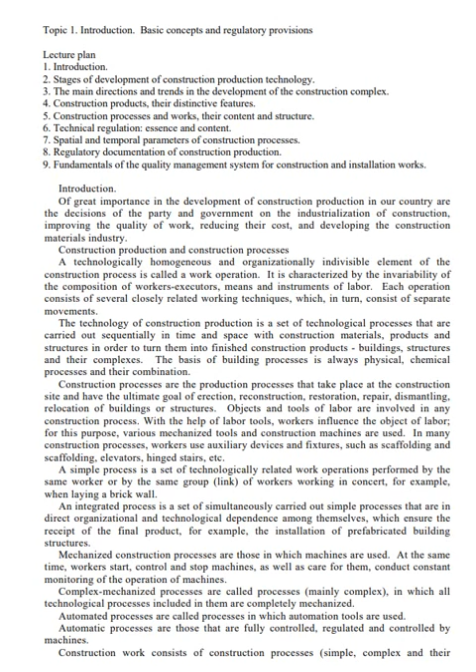Topic 1: Introduction. Basic concepts and regulatory provisions.

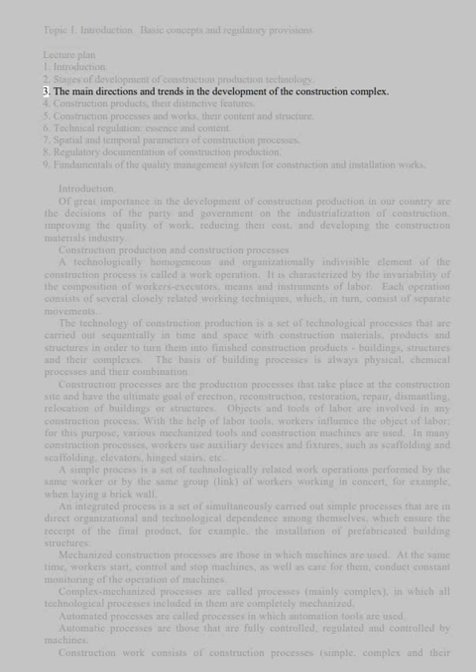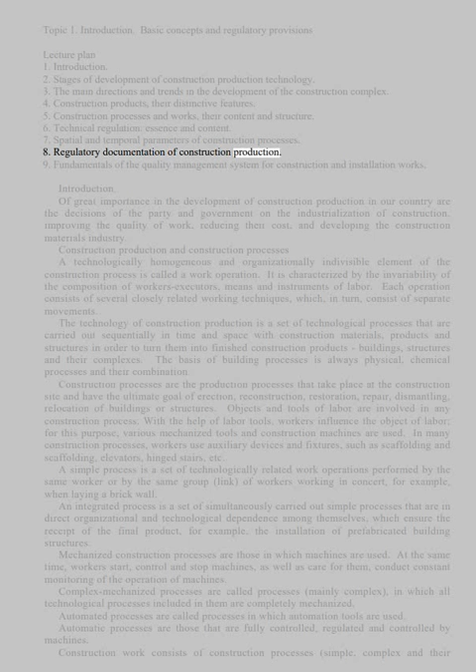Lecture plan: 1. Introduction. 2. Stages of development of construction production technology. 3. The main directions and trends in the development of the construction complex. 4. Construction products, their distinctive features. 5. Construction processes and works, their content and structure. 6. Technical regulation, essence and content. 7. Spatial and temporal parameters of construction processes. 8. Regulatory documentation of construction production. 9. Fundamentals of the quality management system for construction and installation works.

Introduction. Of great importance in the development of construction production in our country are the decisions of the party and government on the industrialization of construction, improving the quality of work, reducing their cost, and developing the construction materials industry.

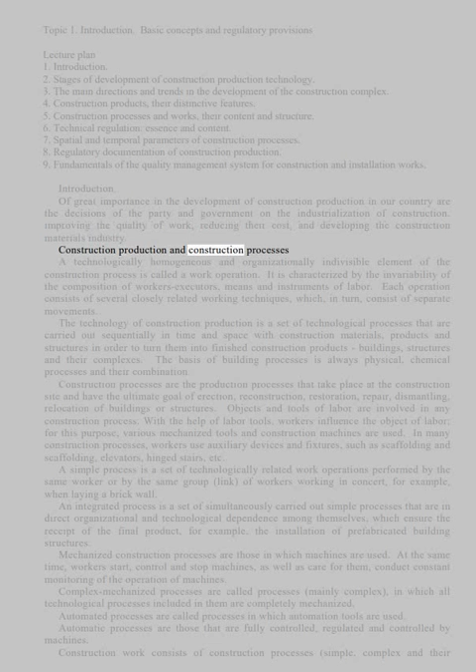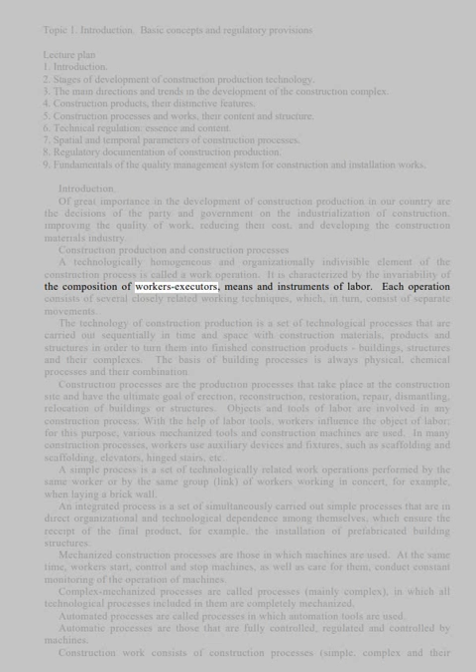In construction production, a technologically homogeneous and organizationally indivisible element of the construction process is called a work operation. It is characterized by the invariability of the composition of workers, executors, means and instruments of labor.

Each operation consists of several closely related working techniques, which, in turn, consist of separate movements.

The technology of construction production is a set of technological processes that are carried out sequentially in time and space with construction materials, products and structures in order to turn them into finished construction products, buildings, structures, and their complexes. The basis of building processes is always physical, chemical processes and their combination.

Construction processes are the production processes that take place at the construction site and have the ultimate goal of erection, reconstruction, restoration, repair, dismantling, or relocation of buildings or structures.

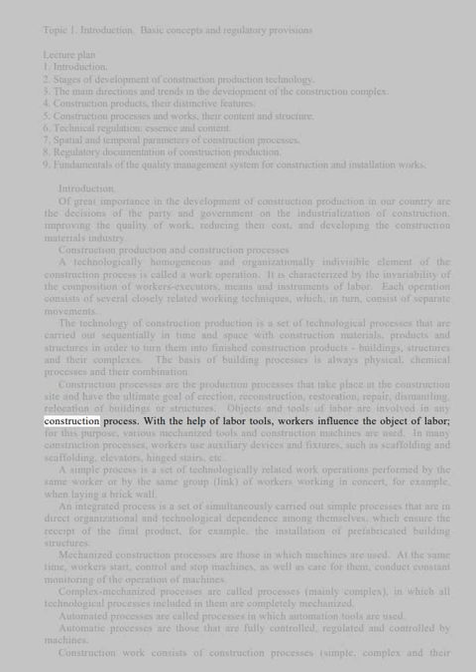Objects and tools of labor are involved in any construction process. With the help of labor tools, workers influence the object of labor. For this purpose, various mechanized tools and construction machines are used. In many construction processes, workers use auxiliary devices and fixtures, such as scaffolding, elevators, hinged stairs, etc.

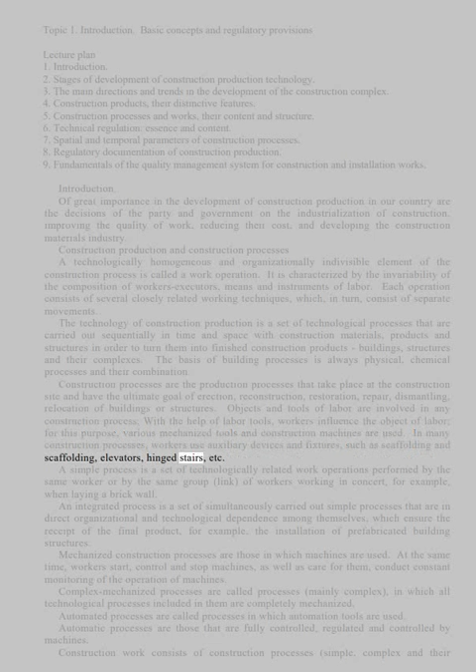A simple process is a set of technologically related work operations performed by the same worker, or by the same group or link of workers working in concert, for example, when laying a brick wall.

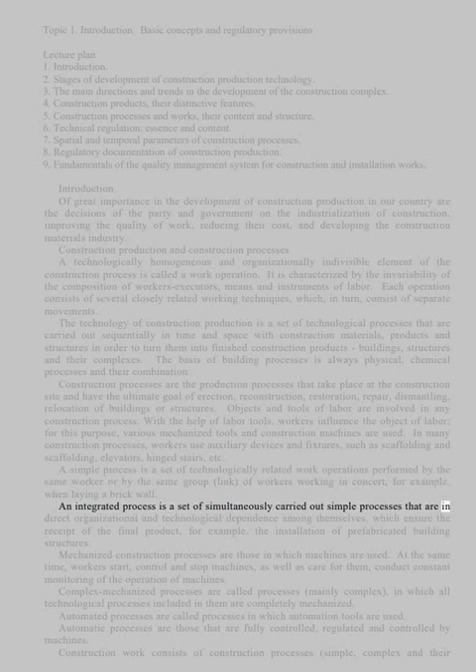An integrated process is a set of simultaneously carried out simple processes that are in direct organizational and technological dependence among themselves, which ensure the receipt of the final product, for example, the installation of prefabricated building structures.

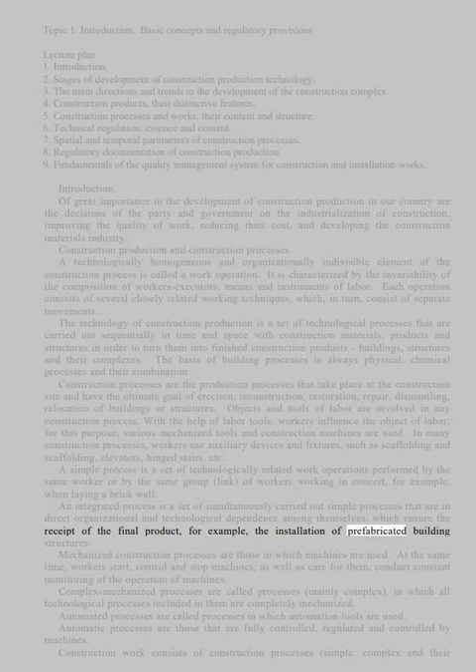Mechanized construction processes are those in which machines are used. At the same time, workers start, control and stop machines, as well as care for them, conducting constant monitoring of the operation of machines.

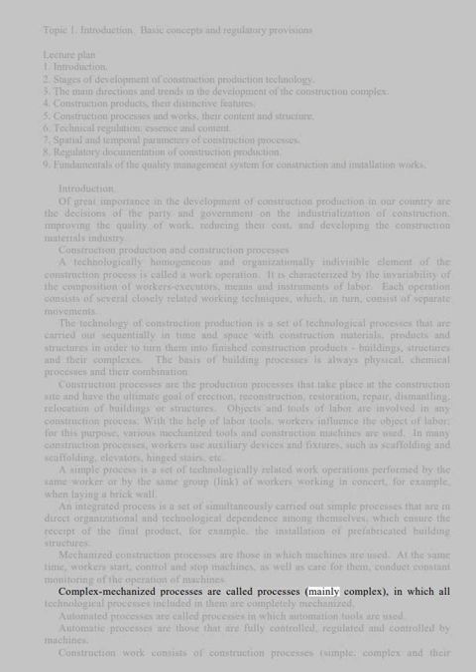Complex mechanized processes are processes, mainly complex, in which all technological processes included in them are completely mechanized. Automated processes are processes in which automation tools are used.

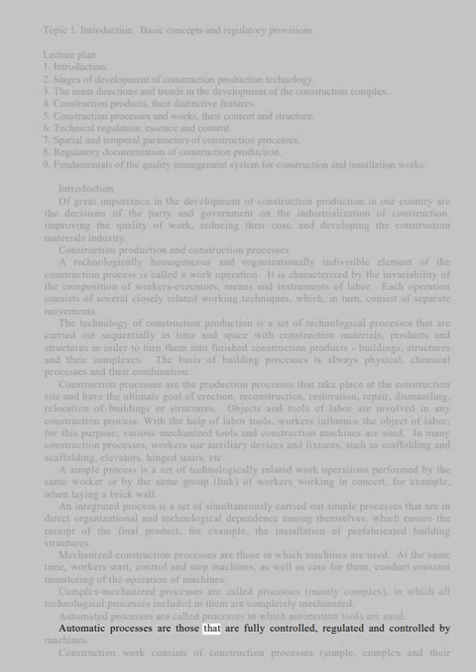Automatic processes are those that are fully controlled, regulated and controlled by machines.

Construction work consists of construction processes, simple, complex, and their combinations, the result of which is a certain construction product. It must meet the project requirements and the corresponding technical conditions in terms of size, shape, surface structure, position in space, and quality.

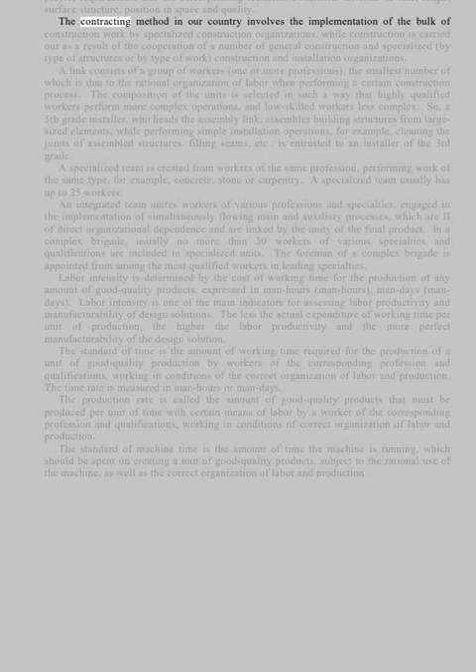The contracting method in our country involves the implementation of the bulk of construction work by specialized construction organizations, while construction is carried out as a result of the cooperation of a number of general construction and specialized organizations, by type of structures or by type of work, construction and installation organizations.

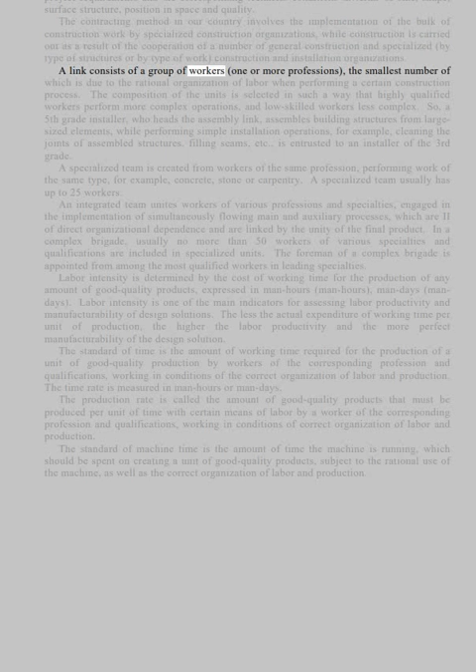A link consists of a group of workers of one or more professions, the smallest number of which is due to the rational organization of labor when performing a certain construction process.

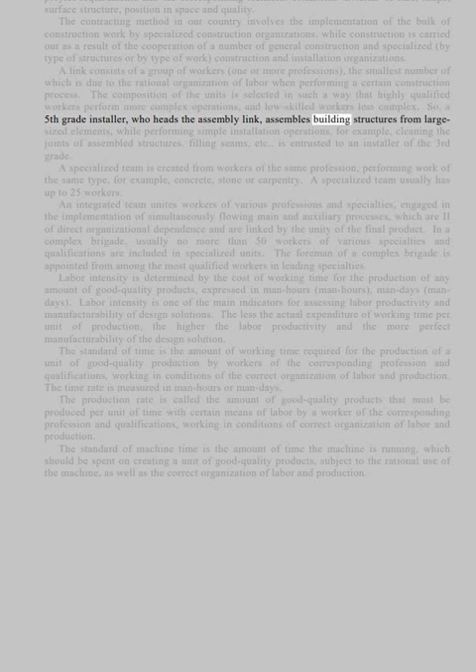The composition of the units is selected in such a way that highly qualified workers perform more complex operations, and low-skilled workers less complex ones. So, a fifth-grade installer, who heads the assembly link, assembles building structures from large-sized elements, while performing simple installation operations, for example, cleaning the joints of assembled structures or filling seams, is entrusted to an installer of the third grade.

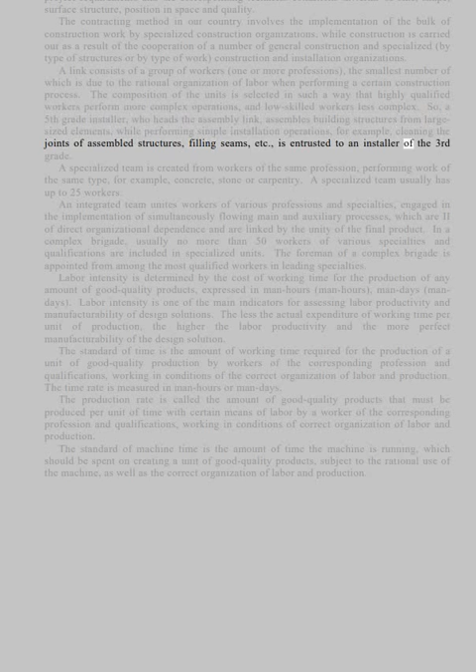A specialized team is created from workers of the same profession, performing work of the same type, for example, concrete, stone, or carpentry. A specialized team usually has up to 25 workers.

An integrated team unites workers of various professions and specialties, engaged in the implementation of simultaneously flowing main and auxiliary processes, which are in direct organizational dependence and are linked by the unity of the final product.

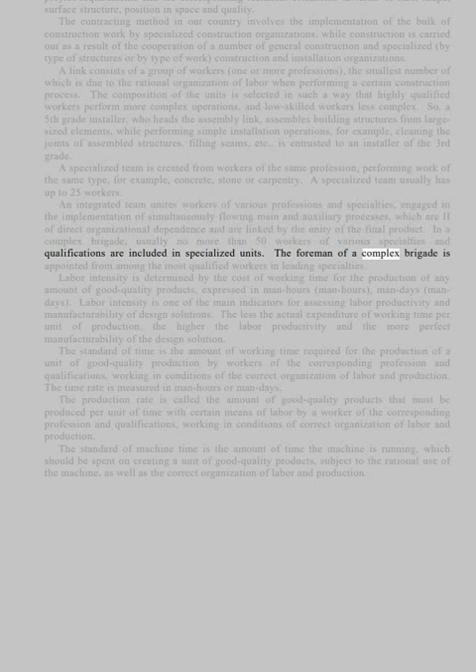In a complex brigade, usually no more than 50 workers of various specialties and qualifications are included in specialized units. The foreman of a complex brigade is appointed from among the most qualified workers in leading specialties.

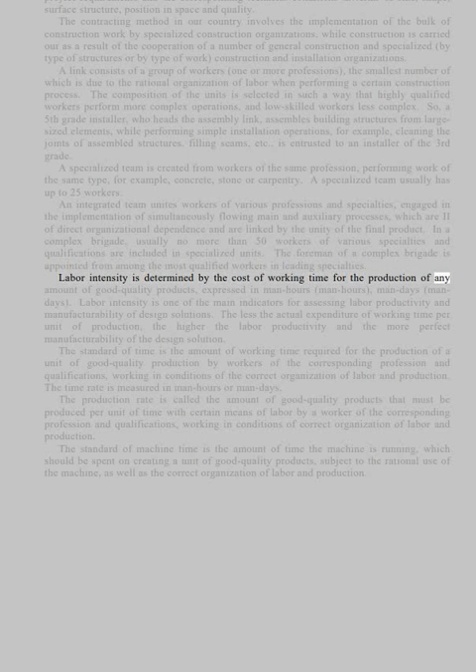Labor intensity is determined by the cost of working time for the production of any amount of good quality products, expressed in man-hours or man-days. Labor intensity is one of the main indicators for assessing labor productivity and manufacturability of design solutions.

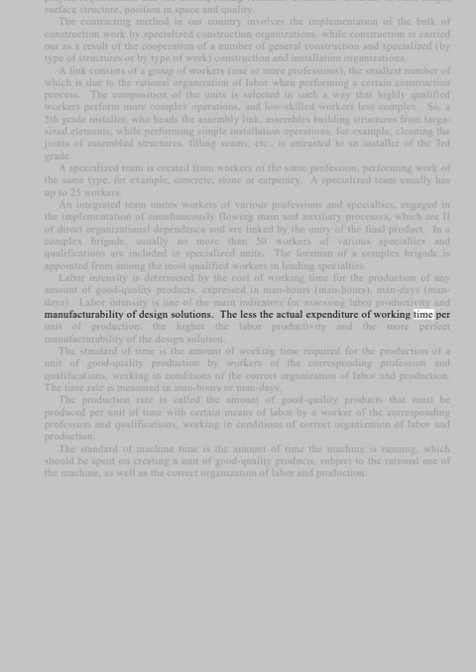The less the actual expenditure of working time per unit of production, the higher the labor productivity and the more perfect the manufacturability of the design solution.

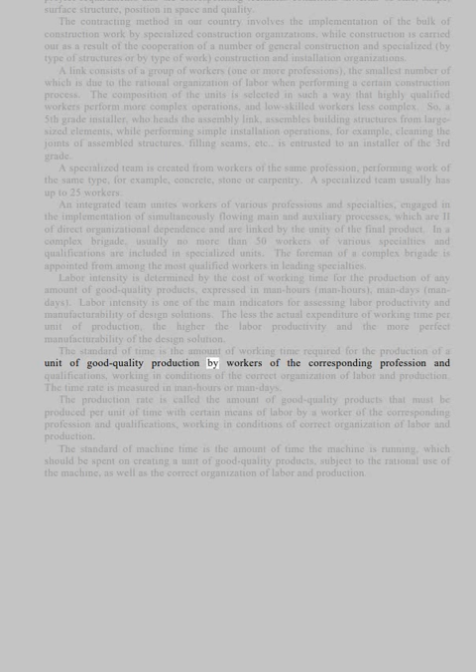The standard of time is the amount of working time required for the production of a unit of good quality production by workers of the corresponding profession and qualifications, working in conditions of the correct organization of labor and production. The time rate is measured in man-hours or man-days.

The production rate is the amount of good quality products that must be produced per unit of time with certain means of labor by a worker of the corresponding profession and qualifications, working in conditions of correct organization of labor and production. The standard of machine time is the amount of time the machine is running.

This standard of machine time should be spent on creating a unit of good quality products, subject to the rational use of the machine, as well as the correct organization of labor and production.